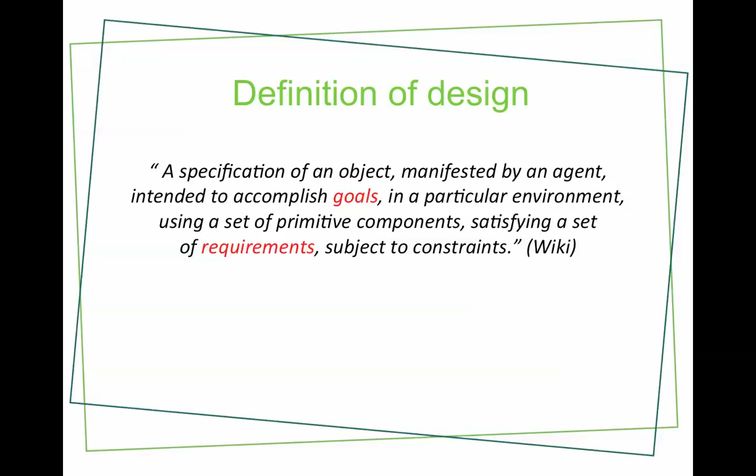And I think if you set off with what the definition of good design means, you start with an artist. Now, an artist has almost no constraints. An artist basically just has a vision. Their constraint might be the size of the canvas that they have and the budget they can afford on paint. But other than that, there's nothing. Their creative mind just gets to work and they create something that's beautiful.

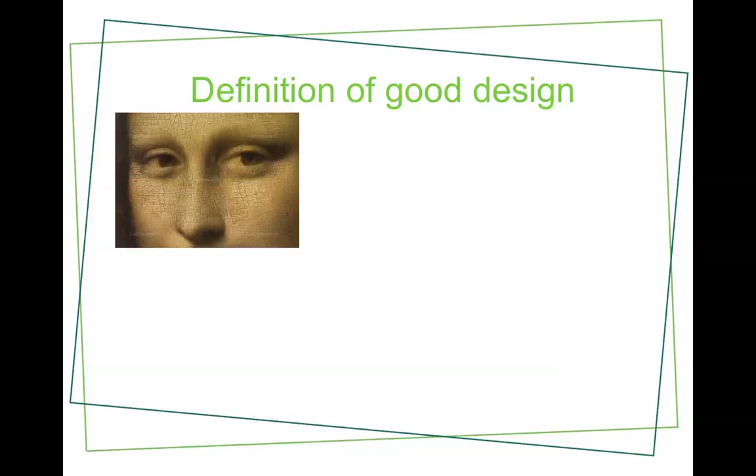And their goal or requirement was to create something either intrinsically beautiful or something that's going to spark interest, or whatever. That was their goal, and the constraint was the size of the canvas and the paint they had, and away they go. Now, architects are pretty much the same.

You've got a goal, which is to create a beautiful building that works, that people can function in and has a good outcome. So pretty much a similar concept.

Now, engineers are the same. Everyone thinks that engineers aren't designers or architects, but we are. We have requirements, we have goals. The building has to stand up - that's our goal, that's our requirement. And the constraints are budget, material use, and so on. And we have to hit those goals with that budget.

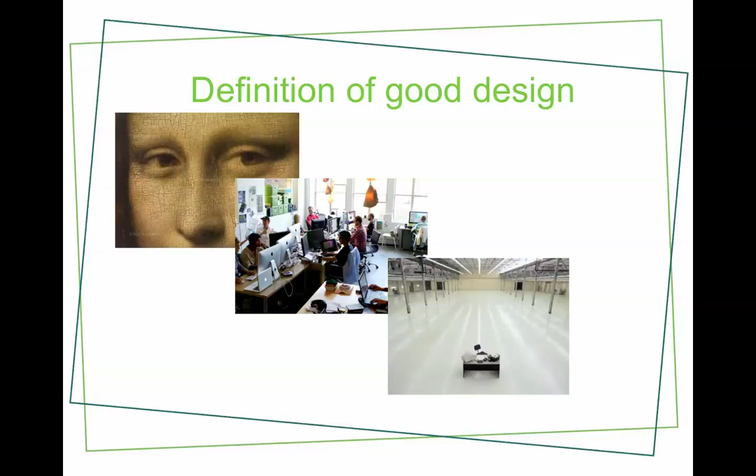So we're all designers, and in the perfect world, you have all of these designers working collaboratively with the client, and we all smile and we're all happy and we all hold hands and sing Kumbaya and we get a really, really good outcome. And that's the definition of good design.

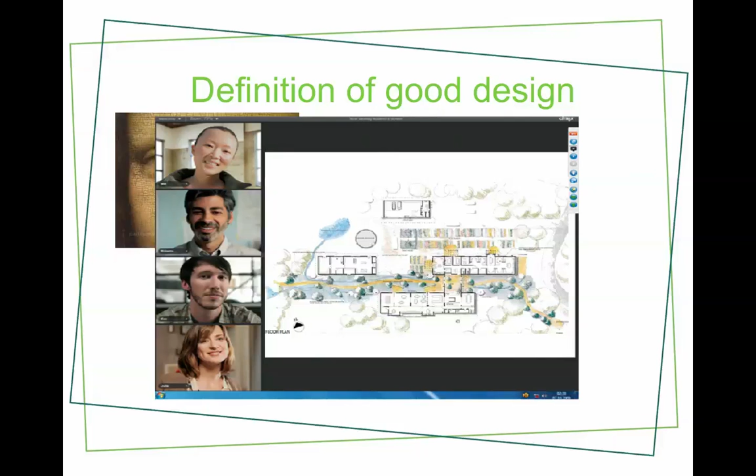So that's the definition of good design. So I was going to give you two examples - the story of two designs.

So I guess this is the first story, and I've changed the picture. It doesn't actually represent a real client, although that is a client. But this is a performance-based client - the client that comes to us and doesn't put any constraints other than I have a budget. It's like the artists, the only constraint is the size of the canvas.

And all that client said when it came to ESD, I want a carbon neutral outcome. That was it. It's got to be low cost. So that was our constraint.

So what did we do? Well, we went away and we plugged all the different options and opportunities for technologies and solutions in there, and they got a 7-star thermal performance, which is 1 star above business as usual, 1 star above building code compliance, which is 6 star. So a lot of ESD types would probably say that's not very good, 7 stars, not very flash, but that's what we did.

Solar PV, solar hot water, a bunch of low embodied energy materials, and a few other bits and pieces, but essentially they got a carbon neutral outcome. So 100% improvement on business as usual, a house that's producing way more electricity than it's consuming.

The additional capital outlay for that particular construction was about 10 grand. So the return on investment for the stuff we did is going to be about 5 years. So a pretty damn good outcome.

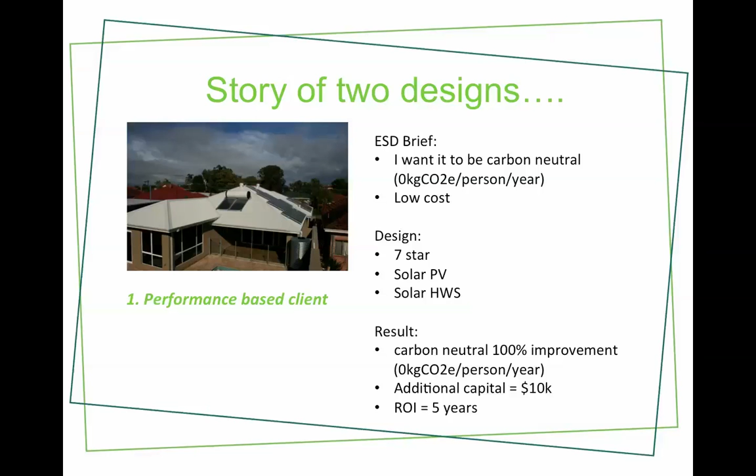The next example is the prescriptive-based client. So this is a client who says, I want it to be eco-friendly, and it must be 10-star. I must have 10 stars.

I must have double glazed windows, and I want a roof garden, and it must be north-facing, and all these other things - and that's not the exhaustive list. So basically, the design had been done for us. You've basically given the artist the canvas and the outline of the picture they have to paint, and told them what colors they have to use. So that's what we gave them. There wasn't much to it. We couldn't really do anything.

Now, all of those things gave them a 15% improvement on business as usual. Cost them about 45 grand extra per unit. They got a lower yield because they had a roof garden - they couldn't fit an extra apartment up there. Return on investment was probably 25 years at worst.

So there's two examples of two different clients and two different design approaches to ESD, environmentally sustainable design - prescriptive versus performance. So where did it go wrong?

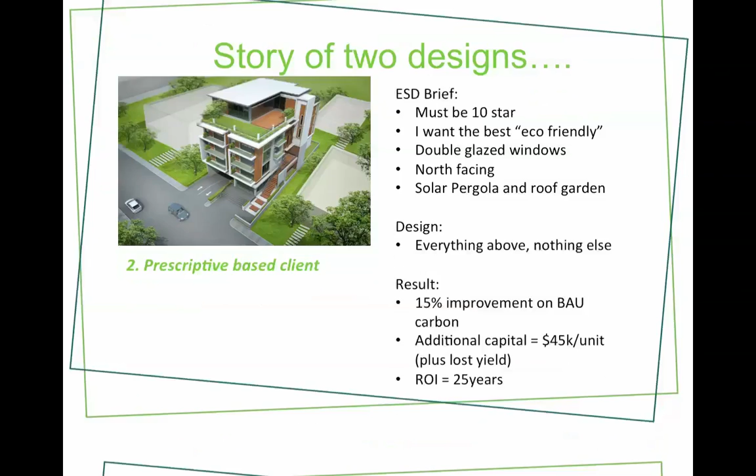Well, being over-prescriptive in the design brief - you took the D out of ESD. There is no design. You've got an artist that's been told what color paints they have to use and what size canvas and what the outline of the drawing's going to be. You've got an architect that just has to build it like it's been spec'd. You've got an engineer that just basically ticks boxes at the end of the design and goes, okay, you've got a 15% improvement, yeah, you've got your 10 stars. Yeah, cool, on we go.

So you have no happy designers. You might have a happy client because they got the 10-star building, and we didn't sing Kumbaya and hold hands, and you got a pretty crap outcome at the end of the design.

The other thing that goes terribly wrong is that there's no performance-based target. So it was eco-friendly - I must have eco-friendly - but there was no 'I want it to be carbon neutral' or 'I want it to be X kilograms of carbon per occupant per year saving.' So there were no really tangible targets to hit. They were all sort of very prescriptive-based targets.

So there are two massive things that go wrong in that style. The third thing that happens is it generally gets bolted on at the end. It's a rating system - let's design it all, you've already told us how to design it, from the architect to the engineer, and we'll just see how it performs. And we go, oh bugger, I wish we had done more of the design phase. So those are the three things that typically go wrong with that style of design.

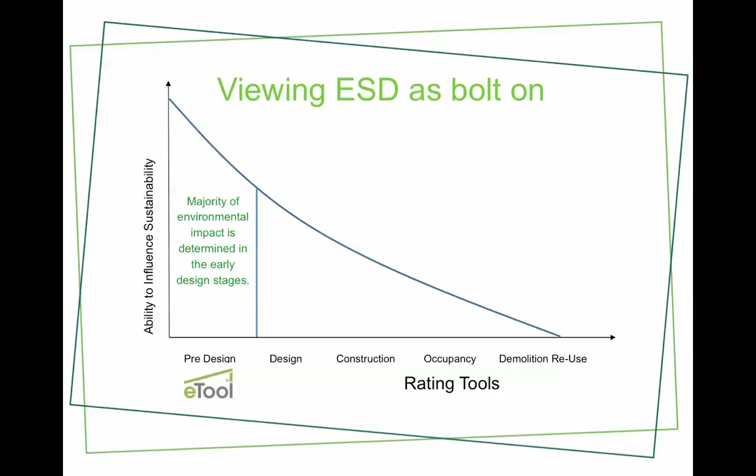So I thought I'd take an analogy from a different industry - the car manufacturing industry. Very similar approach to design though. You have a CEO - now that's a terrible indication of what a CEO does, but essentially their requirement is to make money for the shareholders, pretty much first and foremost, and that's okay.

So how do they do that? Well, they sell lots of cars and they have a profit margin on the car. So their requirements or goals, going back to that definition from Wiki, is cars per year and dollars per car, the profit margin on the car. And it's really easy - then they say to the designer, design me something. Now the designer goes, oh yeah, wicked, I'm going to give you a really nice looking cool car. And so the marketing design requirement or goal is to have something that really looks cool. I'm really simplifying the car design industry down to some pretty basic formats, but you get my drift.

So if you went to an engineer and said give me a car, the engineer goes, what's a car for? Oh that's right, it's to get someone from point A to point B. And they don't give a shit what it looks like. There's no status symbol at all in that car because the engineer doesn't care about status symbols or anything - they've just gone, I've got to get you from point A to point B. What's the lightest?

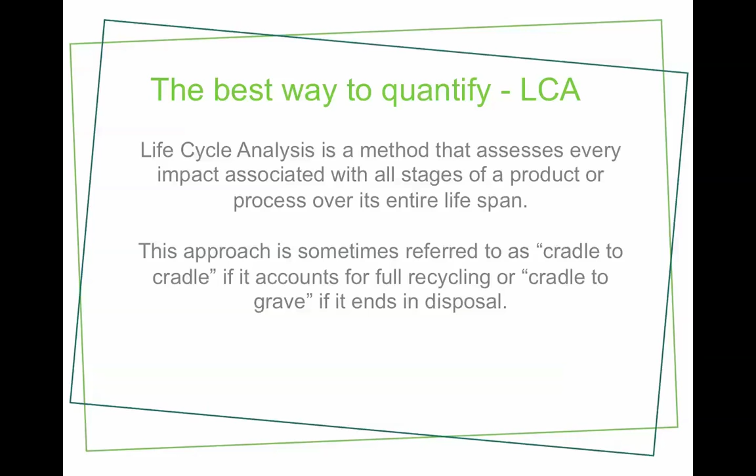So when you look at a building, you start with, say, your materials. If we pick something like iron ore, it's going to start as iron ore in the ground up in the Pilbara - you dig it out of the ground, there's carbon energy associated with that digging process, you process it there, you transport it. It ends up getting to China and goes to a factory where they turn it into a building material. From that building material, it's going to get transported again - it'll probably go back on a boat, back to Freo, into a truck, maybe to a holding yard, then onto a smaller truck, and eventually to a building site. So you have that transport, and then when it gets to the building site, you have to glue it all together, so there's a bunch of energy and carbon associated with gluing the thing together into a building, and then we operate it.

So this is typically where we've always focused when it comes to ESD - we always look at, okay, well how do we get good thermal performance?

How do we build hot water into there? How do we build lights and lifts and car park vents and solar PV? That's typically the biggest component of your carbon impact - that's your operational stuff.

But you also have things like maintenance. Paint's a really good example. Typical residential building, maybe 0.2% of the total carbon footprint when you build it is wrapped up in the paint. But let's say you paint it every 10 years, and that thing lasts 100 years - you're going to paint it 10 times. That 0.2 might turn into 2, or 1.8, depending on how you do the numbers. So suddenly your recurring really stacks up.

Things like carpets, which is great that we don't have carpets here - we love raw finishes. And then you obviously have to dispose of that thing. Hopefully, rather than going to landfill, it gets recycled and put back into the food chain, and away you go again. So that's the cradle-to-cradle understanding of how a building operates and the full life cycle of a building.

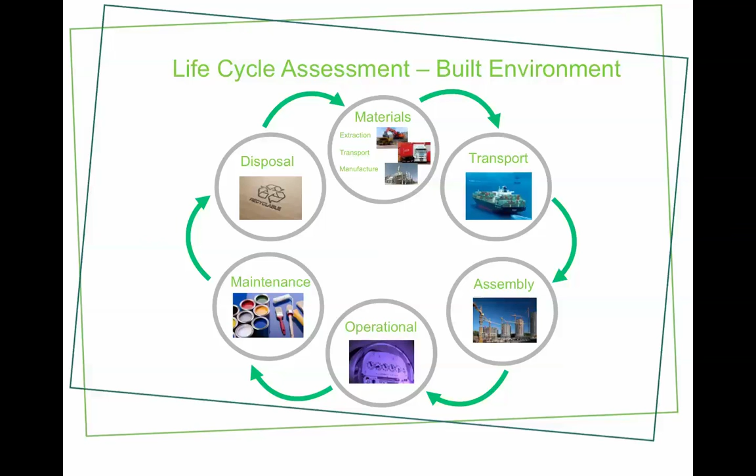Now, the other really important thing with life cycle assessment, and a lot of people forget this, is they think, oh yeah, I've done my materials, I've calculated the embodied energy, and then I've got my operational energy, I'm done. Well, that's only half the picture. In fact, functional units are probably as important, if not more important, than the cradle to cradle.

What a functional unit is - engineering nerd tech speak - but a functional unit is as it sounds. You actually stop at the beginning and ask what's the function of this product. So a coffee machine's a really good analogy.

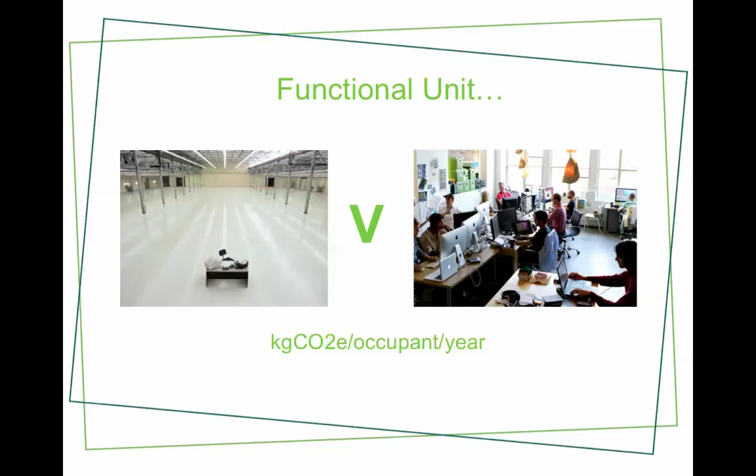That's how you compare these two things and identify which one's sustainable and which one's not. So that's how you quantify stuff. Bringing it back to the original question, the things that you can quantify, you quantify, and you put a life cycle assessment approach on it and create a functional unit.

So if it's carbon, you put the target. I want it to be carbon neutral, which is really easy - so instead of XX, it's just 0 kilograms of carbon per occupant per year. You might go, I want a 50% improvement. So you go, what's a normal building? It's a tonne of carbon per occupant per year. So we're aiming at 500 kilograms of carbon per occupant per year.

Same thing for water - X kilolitres of potable water per person per year. The funny thing is, the water guys have been doing this forever. They've always had nice, tangible targets for water saving. It's just that the energy and carbon guys are catching up in doing that for LCA. It might be things like land use or clearing of natural vegetation or rainforests, and you say we're going to allow X number of metres squared of rainforest clearing per person per year, or whatever it is.

So these are the tangible, quantifiable things. An interesting point though - this definitely doesn't define your design. It's not saying you now must design according to these. They're only there to help inform the design. So as an architect or designer, you're sitting there going, oh shit, I've got to try and hit these targets. What sort of things should I be doing to hit those targets? How do I get there? And that's the important bit here with the quantifiable stuff.

Actually, I'll go back a slide. There's a bunch of things you can't quantify, and I think maybe I'm jumping ahead of myself, but there's a bunch of things you can't quantify. They're things like community development, and a lot of social-based things that you can't put a figure on.

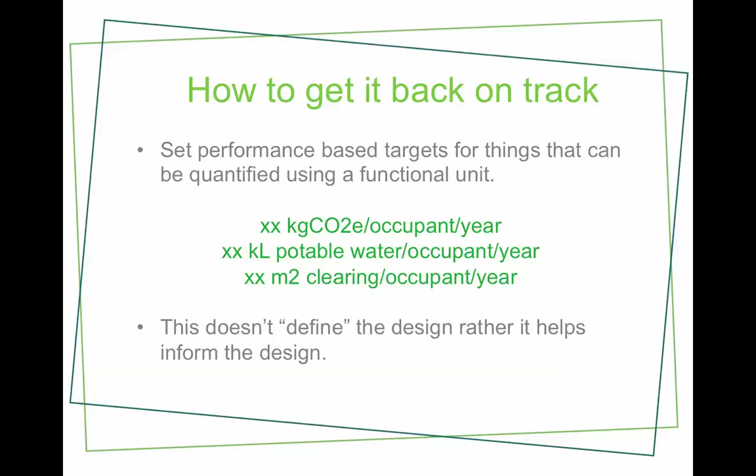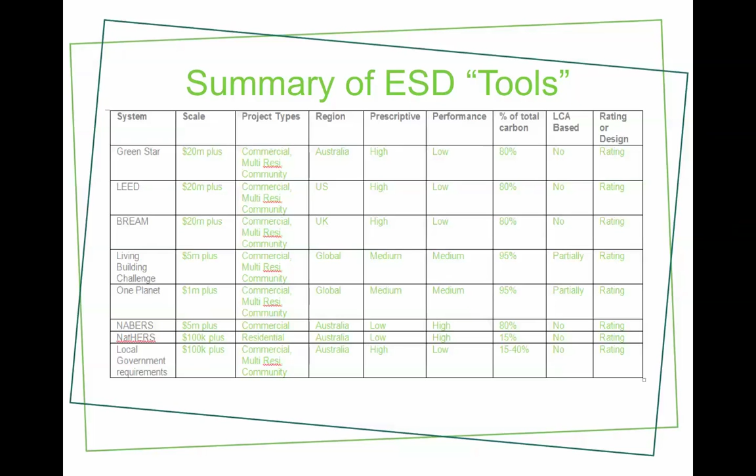So I think from there we say, well, what is a design tool? Number one, it has to be performance based, not prescriptive based. So if you've got a genuine design tool, remember design was about not telling people what the colour of the paint has to be, it's about saying the goal is an energy efficient building. We'll leave it to you as a designer, an architect, an engineer to get it there. So a design tool shouldn't be prescriptive, it should be performance based.

It's really important. It needs to consider everything. I will draw the boundary as far as you can, so in our eyes, that's cradle to cradle. You're basically looking at everything then, and yes, we are biased to LCA, but it's what we believe in. Because if you just take piecemeal and say it's all about solar passive design, or it's all about recycled materials, you're going to miss stuff. You're going to miss a huge amount.

So you've got to look at everything, and you've got to look at it all at the same time, because what often happens is you might change something in a material, but it's going to impact your thermal performance. So you might have a positive impact in your materials, but a negative impact in the thermal performance. And if you've got a system that just says you must have recycled material, go, all right, we use recycled material, but you didn't stop to see what that does to the thermal performance. Well, you tick your box and away you go, you can have some really perverse outcomes. So it's really important to look at it all together.

And finally, really important to include a functional unit, which is what I was describing before, like the kilograms of carbon per occupant per year. Because if you don't, you might have this incredible building that's zero carbon theoretically, and you have this huge glass foyer out the front that the security guard stands in, and you pat yourself on the back, go, carbon neutral building. But you've got this huge space that's being air conditioned, all this glass, and all it's doing is housing a security guard. So functional units are really important to include in what you do.

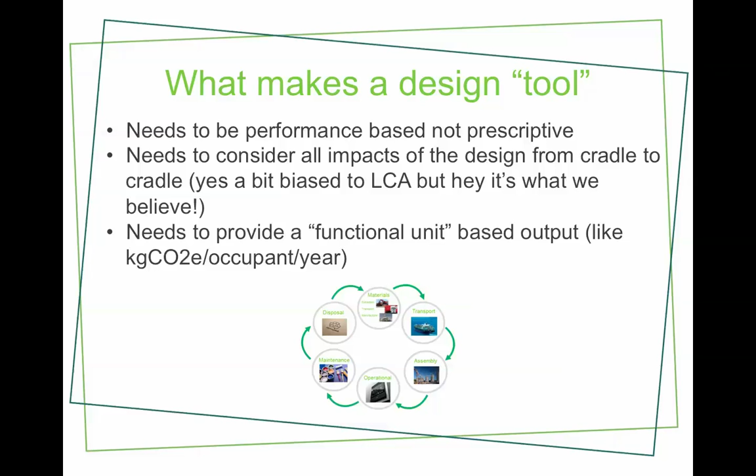I think side elements to what makes a good design tool: it's got to be compatible with the design process. So it's got to be something that the client, the architect, the engineer can all sit down together with this tool or concept and work through that whiteboard exercise, pin things up, create objectives, and actually do stuff with it and inform the design. So it needs to have fast feedback.

So you go, oh, what? Okay, we're in the design stage, we haven't even drawn it yet. What happens if we add another level? What's that going to do to my carbon footprint? Now, a lot of those other tools you mentioned, you've got Buckley's chance of understanding what your carbon footprint is going to do by adding a new roof or a new level. But if you don't check at the design stage, you kind of knack it because you'll get a completely done building and then you'll go and rate it.

So it has to have very fast feedback. It has to be very user-friendly. You've got to be able to extract that design data really quickly because, again, if you can't, it's going to cost too much, and people aren't going to do it. They're going to go, oh, well, we'll try this and hopefully when we get to rate it, it'll do okay. And then generally, you're pretty stuck and you end up bolting things onto your building to try and make it sustainable. So really important that it's user-friendly and cost-effective.

It's got to be accurate too. And this is where it gets really tricky, because it doesn't matter how smart you are, you build a bit of software, you build a tool, you're going to have to put boundaries in it, assumptions, algorithms, and they all have limitations, and sometimes you get it wrong. But we work on this premise that it's better to be vaguely right than precisely wrong. And what we mean by that is you're better off doing it and finding out what the rough numbers are than pretending it's not important and doing a really, really stupid thing with your design.